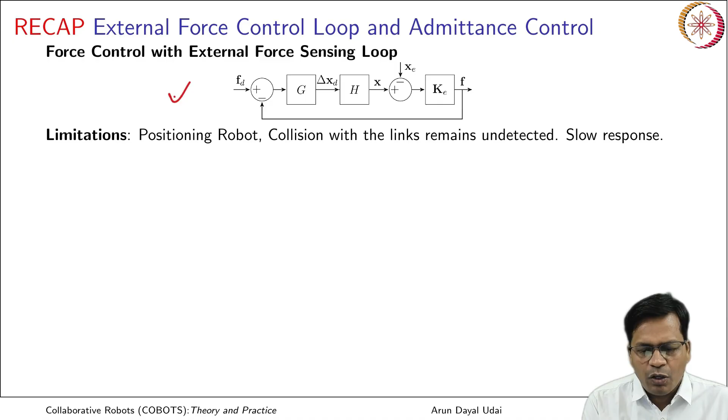So external force control loop, as you see, it looked like this. So it has the limitation of a positioning robot. The kind of robot it used was purely positioning in nature, and it wound up its force control loop from an external force sensor that made it inherently slower in response, and the whole robot was still a position controlled robot, and it had a force sensor at the wrist.

So it could sense forces only after the wrist and not before the wrist. So the collision with the links remains undetected. So this was one of the biggest drawbacks of having such a robot for force control.

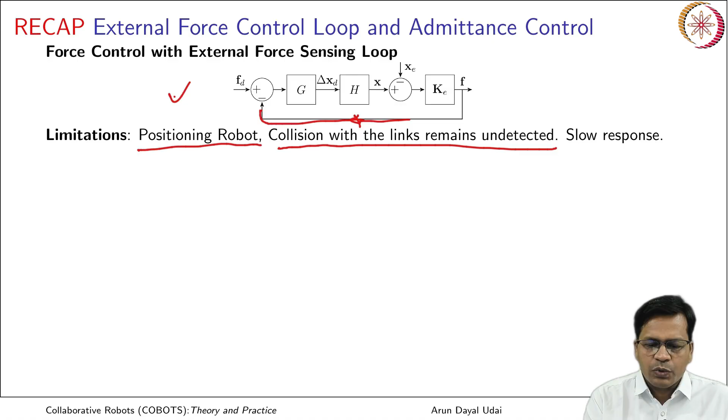And in admittance control, which was an explicit or a direct force controller, you saw this also had a direct input of forces, that is wrench over here, and it could also take up the trajectory input from here, that is the set of position updates can be sent from here, and this also has potential instability limitations, and it was difficult to achieve precise speed control from here.

It was also slower in response because this also was dependent on a kind of external force control loop, because it has a force sensor that gave you a feedback from here. It is very much parameter sensitive also, and it is not suitable for unpredicted environments. So anywhere where you need pure force control to a greater precision, you can use admittance control, but definitely not for achieving precise speed control. So these two were earlier force control approaches which were in use.

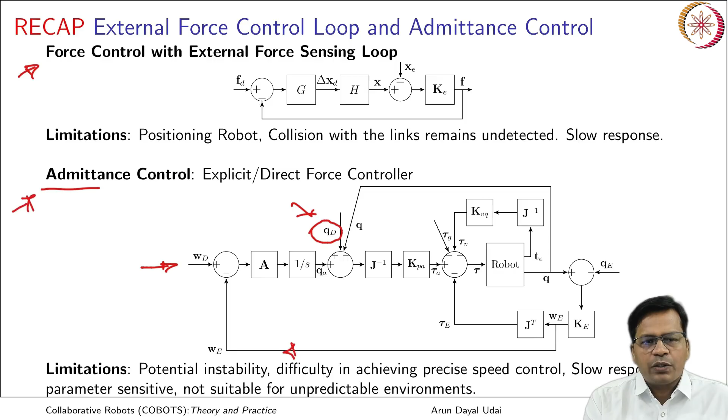So later on, a hybrid force control approach was proposed by Raibert and Craig in 1981. They used a modified JPL Scheinman Stanford arm with a Maltese cross wrist force sensing. So it had both the inputs. You see, it can take up the position trajectory from here, and it can also take up the force trajectory from here, and it has two sensors. The first one could sense the wrench from here, the wrench or the combination of forces and moments. So that is the feedback.

Because this again used force sensing at the wrist, the wrist may be oriented anywhere with respect to the base. So that coordinate transformation needs to be done in order to express both the commanded and the actual forces in the same frame. So you need to have a coordinate transformation here. So this is the feedback and this is the desired wrench. Taking the difference will give you the difference in wrench, delta W. Again from here, you have a desired position trajectory input, and this is the actual position. Taking the difference will give you the delta Q.

Now what is S and I minus S? S is essentially a compliance selection matrix. So I minus S generates the complement of the compliance selection matrix, which is essentially a diagonal matrix. It looks like this. So anywhere where you want position to be controlled should be set as 1. So if I set 1 here, 0 and 0 here, the remaining elements are always 0. It is a diagonal matrix. So if any element along x is set to 1, it calculates the difference only along x.

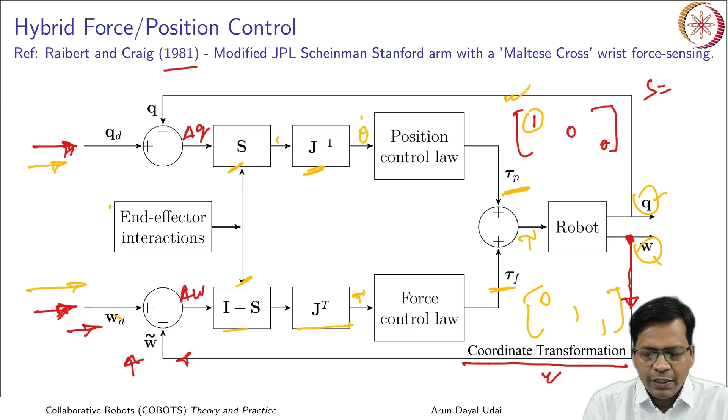So this finally gives you the Q and W. W is sensed using the force sensor, Q is calculated using forward kinematics. So this is how the combined loop operates. So how does this compliant selection matrix operate? That is decided by the end effector interaction conditions.

Okay, let us discuss a little more in detail here. Let us consider one example when you want to insert a pellet inside a hole. In this case, as the coordinate directions are shown, along z direction you need to move, but you cannot move along x and y direction. So if this is x, this is y, the pellet cannot move while inserting along x and y. So you can only send position trajectory along vertical z direction, whereas you can continuously send the forces along x

and y direction. So if you have to use a hybrid force controller for this, the compliant selection matrix will be like this. So you have z as 1 and these two are 0. So the position difference, the error in position, that is position desired and position actual, creates the delta P that gets multiplied with the compliant selection matrix.

The only difference that will be calculated will be along z direction. So corresponding to that, it will create the torque due to the position error along z. So it makes the robot move only along vertical z direction. So position goes along vertical z direction.

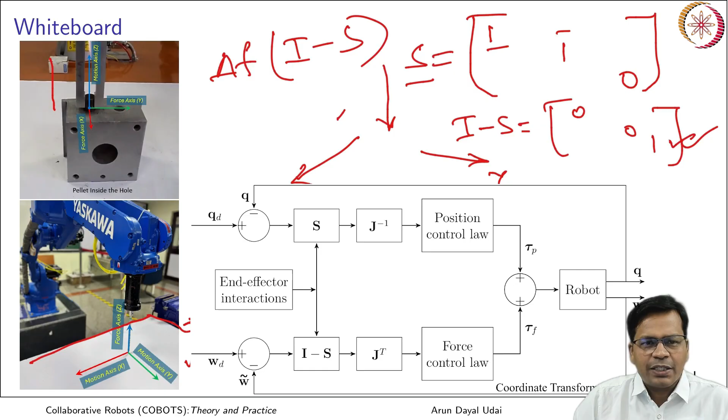When you look closely at this kind of controller, what this end effector interaction is doing is basically setting the compliance selection matrix depending on the situation. So you need a switching mechanism which quickly switches the S matrix elements: which direction to choose for position control and which direction to choose for force control. Accordingly, it has some switching mechanisms.

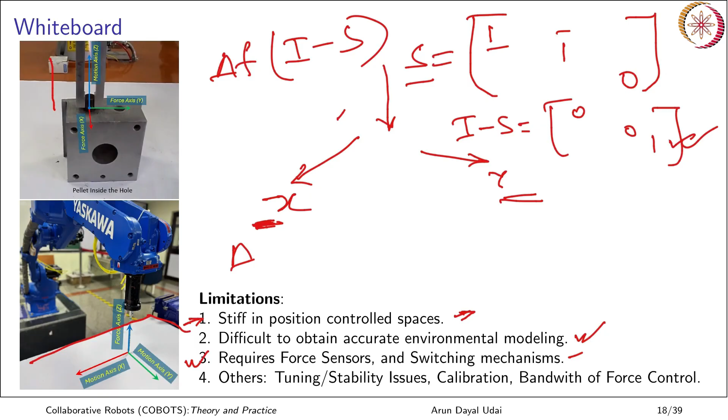There are other issues like tuning issues, stability issues, calibration. You need to have workspaces properly calibrated with the robot spaces, and bandwidth of force control. Bandwidth here means the loop. The loop closure should be done at a very high frequency so as to make it very reliable and very responsive. If that control loop frequency becomes slow, the robot responds a little slower and it behaves like

a stiff robot. Anyway, because it has a force sensor at the wrist, the whole robot is almost very stiff. So these are the limitations with this.

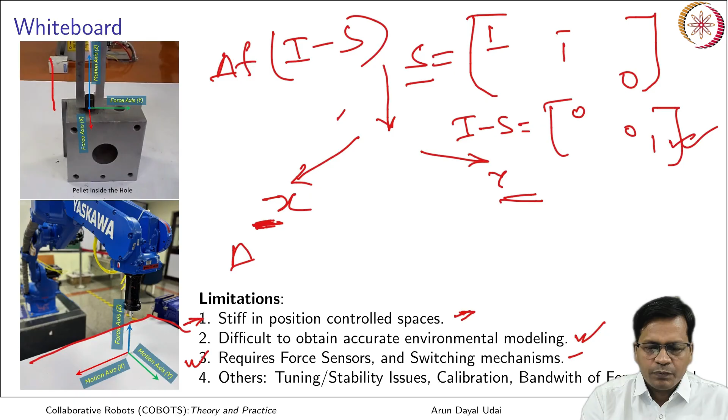Now moving ahead to a different kind of controller. So far the kind of controller that we have studied had an explicit force sensor and you can command the forces directly, but there are also indirect control strategies in which force can be controlled, not precisely, but the whole robot may become a little compliant in almost all the directions.

Okay. So one such type is the stiffness controller. I am discussing it in a simplified way and reduced it to a 3R spatial manipulator here. So it looks like this. This controller is very simple. The robot here is driven by the torque. So once it is driven, it gives you an output position trajectory.

This position is sensed here. You extract the position using forward kinematics and the current position is fed back. So this is the desired position trajectory, this is the actual position trajectory. The difference gives you delta P. Delta P into the stiffness matrix, due to the positional error, generates a force of sorts. So this is the force.

So the force generated out of the error in position is Kp into P desired minus P actual. This positional error is given by delta P. Delta P into stiffness gives you the force. Force multiplied by Jacobian transpose gives you the corresponding torques due to the positional error.

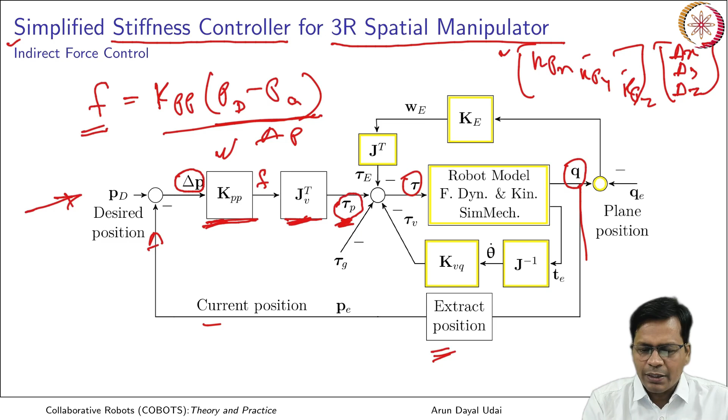Higher the compression, higher the force generated, which after getting multiplied with JV transpose, the Jacobian transpose, gives you the torque that actually drives the robot. So corresponding torques are generated. So what are the other torques visible in this loop? Let me make it clean. Tau g is the gravity compensation torque.

What is tau e? Tau e is the torque which comes due to the environment interaction. Whatever is the difference in the position here, or you may have a direct force sensor here, gives you the force, which when multiplied with Jacobian transpose gives you the torque. So Jacobian transpose into the sensed wrench gives you the torque due to environment interaction. This torque is only because of the environment interaction, and this torque is because of gravitational compensation.

So what is this? Tau v. Tau v is because of the damping in the joints. Whatever is the end effector velocity, known as twist, when multiplied with Jacobian inverse gives you the joint rates. Joint rates into the joint damping matrix give you tau v. So Kv into theta dot gives you tau v. This is the damping torque at each joint.

Normally, all the blocks marked in yellow are not there in the physical system. A physical system will have natural damping. It will automatically respond through the series of forces to the joint torques. So you need not calculate this yellow block here. A physical robot will be directly driven by the torque, and it will give you the rates, at the end effector or at the joints. So it will directly move; forward dynamics is not required there.

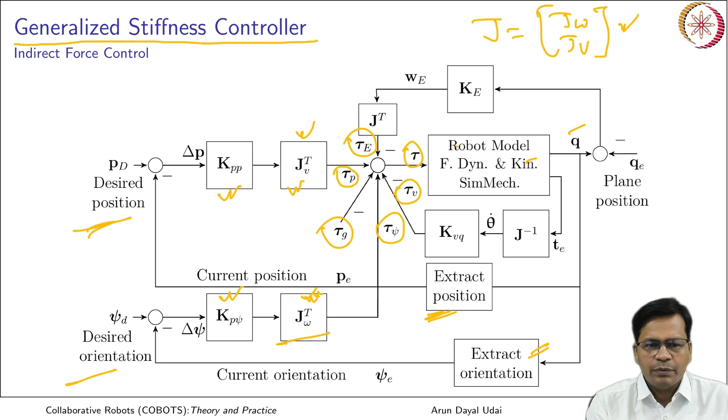So you have to extract orientation depending on the type of Euler angle frame representation that is used. You have to convert it to an equivalent so that you can multiply with the Jacobian. Okay. Similarly, the position extraction is done using forward kinematics and it is fed here. Okay. So, this is a generalized stiffness controller.

Now, we will demonstrate the stiffness controller using a 3R spatial arm in the MATLAB Simulink environment. Again, the prerequisite will be MATLAB with a standard Simulink environment, Simscape or the multi-body toolbox. The Robotic System Toolbox will be optional. I will be using embedded MATLAB code for my Jacobian and gravity compensation torque. A paper that I have cited here, Simulation of Force Control Algorithms for Serial Robots, by me, can be found in IEEE SI 2012; you can download it and go through it.

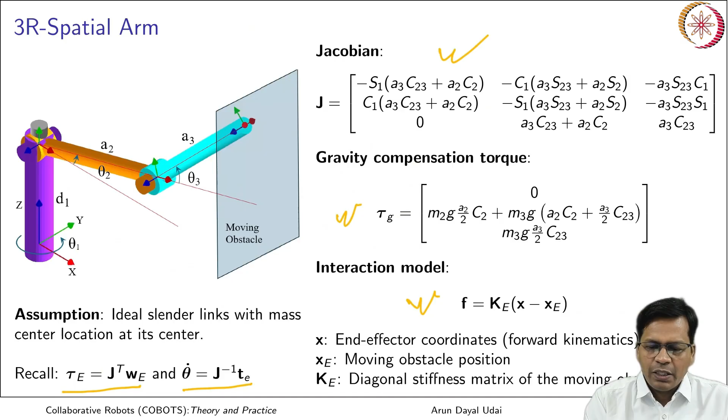So, now let us switch to the MATLAB environment where I will be directly using these equations. So, let us go there. So, this is the environment that I have built. You see everything is the same. You already have done the Jacobian, you already have done the interaction model to generate forces out of the wall interaction, moving plane interaction, and can calculate the contact status and reaction forces. This is the moving obstacle model that you have already done in the previous lecture.

This is your 3R spatial arm from here till here. So, I am doing the whole robot modeling here, the 3R spatial arm. I am feeding it with the torque which is here, tau 1, tau 2 and tau 3, all 3 generated from within the stiffness controller now. And the stiffness controller and everything else, like the Jacobian or gravity compensation, is taken from Q1, Q2 and Q3. They all consume this to calculate the gravity compensation torque as well as the robot Jacobian. So, everything is already known. End effector robot position and the environment position are saved here, and will be used to do interaction modeling.

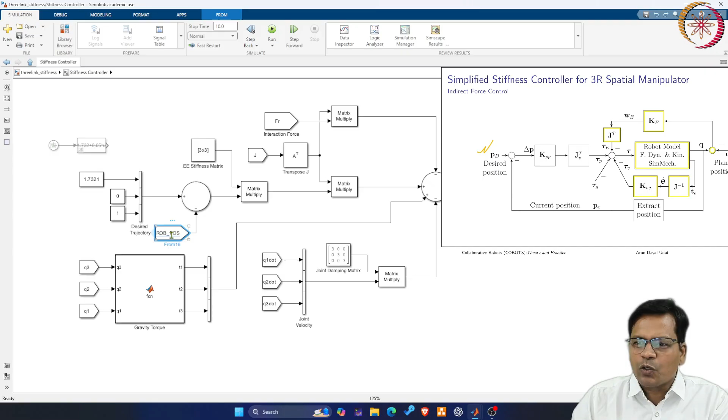Now, let me get into the stiffness controller. So, what I am doing here is, this is the desired position which I want, and the actual robot position is sensed here. Let me just display the controller once again. If you look closely, this is the desired input which was here. The desired input comes from here, and then the actual robot position, which was calculated by the robot forward kinematics, comes from here. Then this is the summing block; it takes the difference. This is plus, this is minus, and it calculates the delta P here. So, delta P goes to the

stiffness matrix. So, I have multiplied it with the diagonal stiffness matrix. The stiffness is 500 along x, 500 along y and 500 along z. That is Newton per meter. This is how I have kept it; you can take anything else. All the models I will be sharing in the resources; you can download them and try them out.

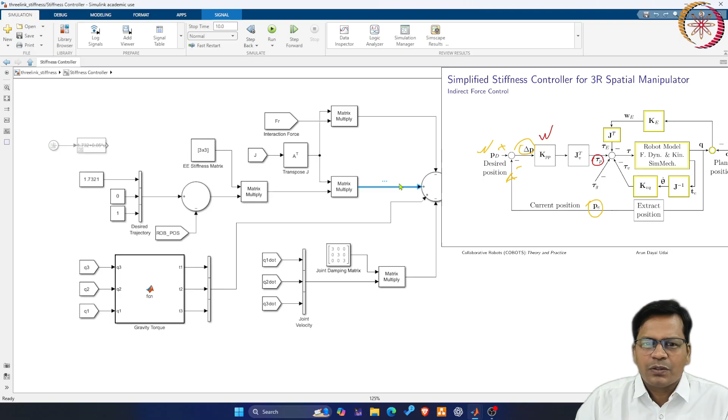So, stiffness multiplied by delta P gives you the force equivalent, and the force, when multiplied with the Jacobian transpose, gives you the torque corresponding to the positional error. So, this is the tau P which is shown here in the model. This goes here; you can look closely. So, that is the tau P.

So, here is your position input, this is your robot position; taking the difference gives you the error, multiplied with the stiffness matrix, further multiplied with the Jacobian transpose, gives you the torque corresponding to the position error. So, that is the stiffness that can be realized by the robot, and finally it goes to the robot using tau 1, tau 2 and tau 3. The other taus are torque due to gravity, which is calculated here and goes to the robot through this channel.

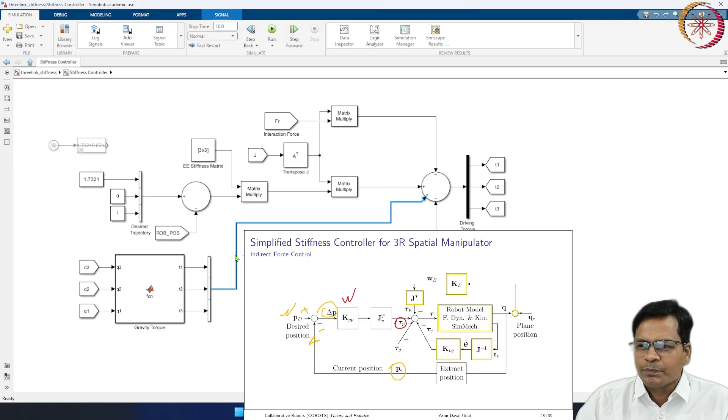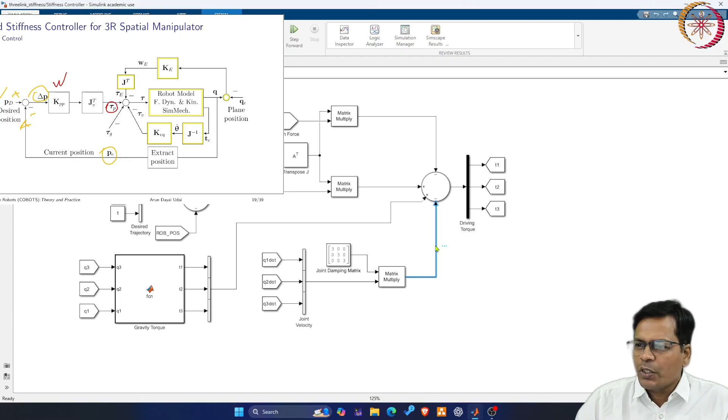Again, you have torque due to the damping. Joint damping I have taken as 3 Newton meter per angular velocity. So that is here. The angular velocities are calculated using Q1 dot, Q2 dot, Q3 dot. Joint rates multiplied by joint damping give you the joint torque due to the robot joint damping. So that is what is calculated here. In a real robot this won't be there. So, this is the damping torque input, this is the gravitational torque input, and this is the environment interaction.

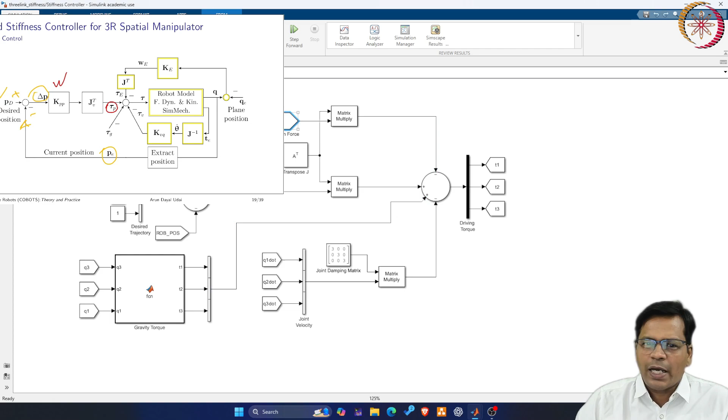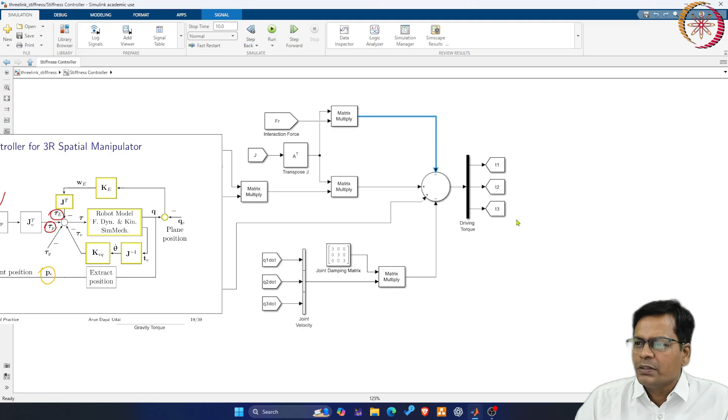So whatever interaction forces are calculated by our interaction model come through this channel. The interaction model output, multiplied with the Jacobian transpose once again, gives you the torque due to the environment, which is here in this loop. All the torques are summed together and sent to the joint. So this is your stiffness controller.

Now let us run this model and see how it behaves. Upon running it, it clearly shows the wall interaction. Let me run once again. The wall started moving, it made a contact, it started pushing the end effector. The wall is moving with 0.05 meter per second towards the robot. So this is how it behaved.

Let me see the plots here once again. This is your reaction force. Higher is the displacement, higher is the force generated. If the wall is moving closer to the robot and pressing it, the displacement from the commanded position increases. The robot wants to be in its place, so higher is the pressing, higher is the force, and it behaves in a linear way.

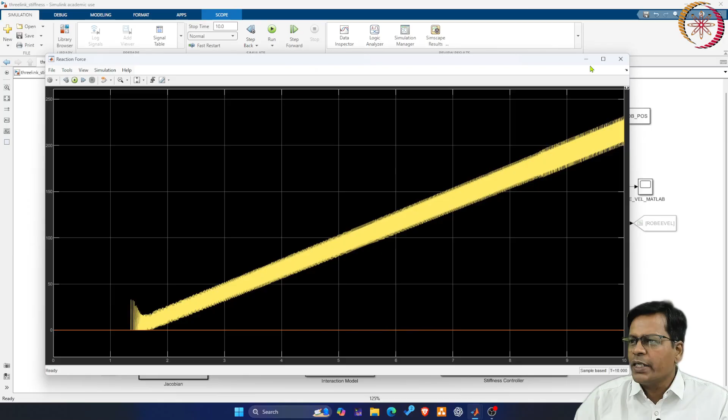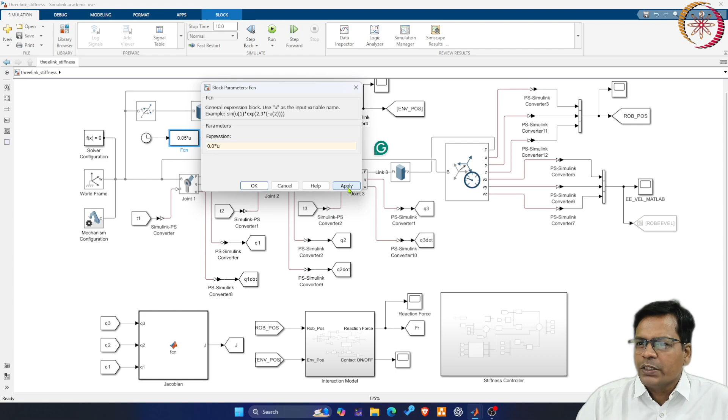Alternatively, this time I moved the wall with 0.05 meter per second. You can even make the wall stationary and let the robot go ahead and hit the wall. Let me do that. I'll make it 0. Displacement is equal to ut, velocity into time, so the velocity becomes 0. Time comes from here, as we did in the earlier model.

Now I'll use this block which I kept commented. I'll uncomment this one and comment out this one, and connect this. This makes the desired robot trajectory input. Again this is a clock input. It starts from 1.732, the current location of the robot, plus 0.05 into t. So this is the displacement, moving towards the wall with a velocity of 0.05 meter per second.

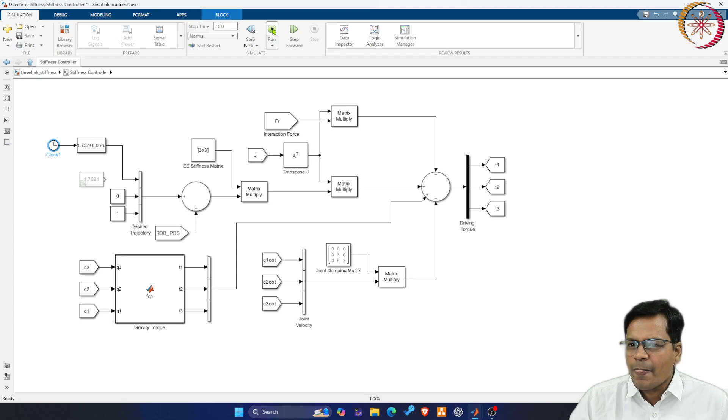Now let me run this. You see the animation here. It goes, hits the wall and remains there, but it will generate more force as time progresses. Why? Because you have continuously commanded it to go further into the wall. So there is a huge difference between the actual and commanded position, and that difference multiplied with the stiffness matrix creates more force.

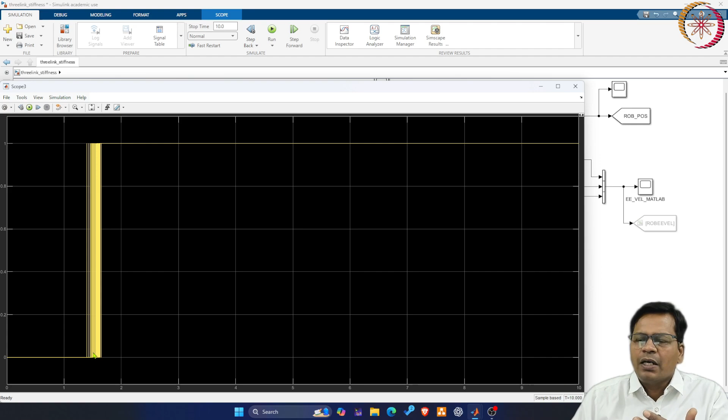The force here reaches there, jitters a bit, and then keeps increasing linearly. In a stiffness controller, the problem is this jittering. It is not a continuous force, because it is a spring-like behavior, it is bound to oscillate. In the contact plot: no contact, then upon the first contact it bounces off and jitters, and finally establishes a constant contact.

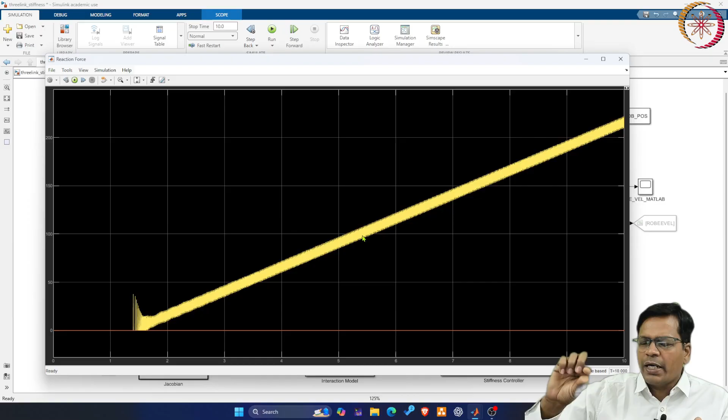So this bouncing is there. It doesn't maintain a constant contact, it bounces for a moment, and then continuously maintains contact. This is the problem with the stiffness controller: the reaction force is not steady. It should be a straight line, but it goes a little plus or minus beyond that line. So this is the behavior of a stiffness controller.

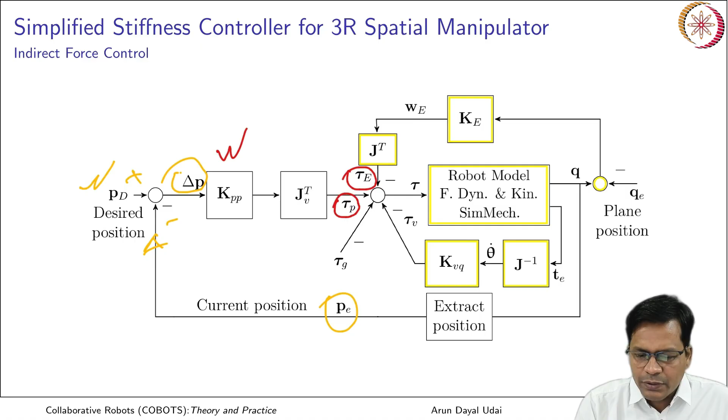Now let us go back to the slides. This is a generalized stiffness controller, and we have simulated it. You have seen the problem with the stiffness controller: too much jittering upon contact, and the force is not steady. Whatever compression it is doing, it should generate that much force, but it oscillates about that point. That is not desired.

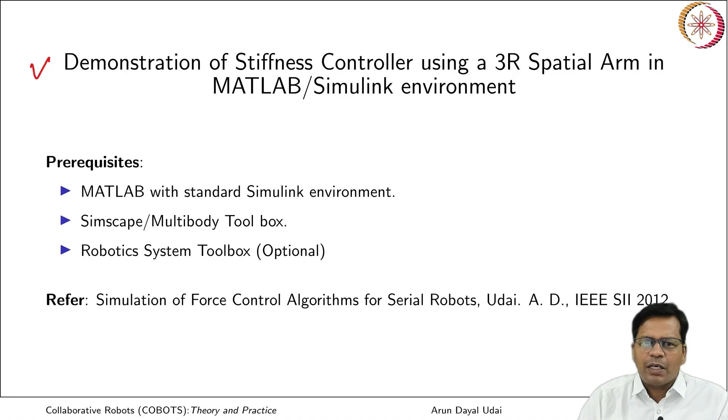There is another approach known as the impedance controller. We will see the impedance controller and its variants in the next lecture.